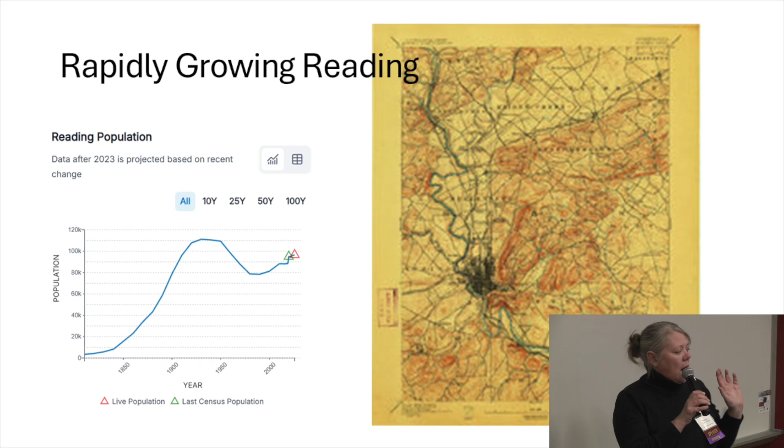Reading had a very interesting population curve from when we were founded in the 1740s. We are now 278 years old this March. From about 1800 to about 1900, we doubled our population every 10 years. That's a lot of growth, and obviously it's a lot of poop. So having to deal with that became a critical thing for the City of Reading.

On the 1894 map, which was right around when we were peaking in population, we are the black blob up here. That is the city, and you can see all of the watersheds marked out here.

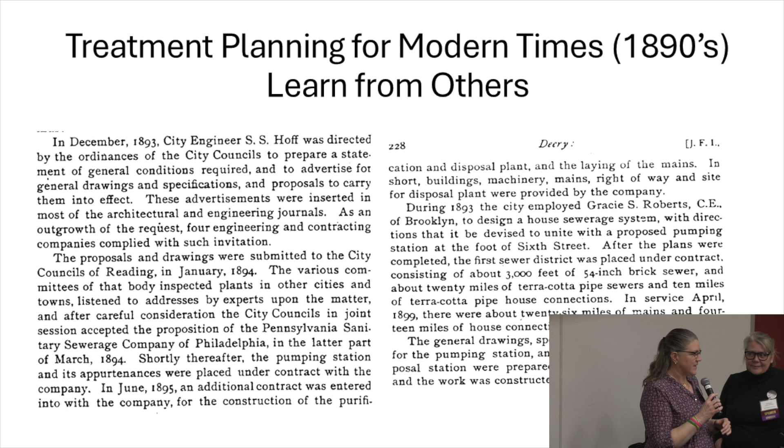What we did here was try to learn from everybody else and look at things more holistically as we went through. We had a few really key decisions made early on.

For the collection system, in the United States everybody was combining their systems. You get the stormwater in there, it washes your pipes, and you don't need to worry about maintaining 2 feet per second velocity because the stormwater washes it right through. But in Europe, land was at more of a premium, so they wanted less land for a treatment plant and kept the systems separate. You have less that has to be treated.

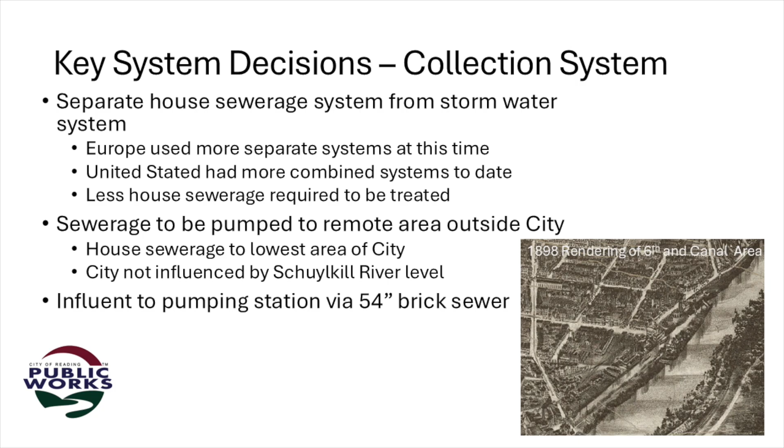The city, thankfully, made a very important choice - our forefathers were great, we're separate. They also learned from other places and wanted the sewage to flow by gravity to the lowest part of the city and then get it out of there. By doing that, the river level doesn't impact what you're doing. The influent to this pumping station is the same 54-inch brick sewer we have today.

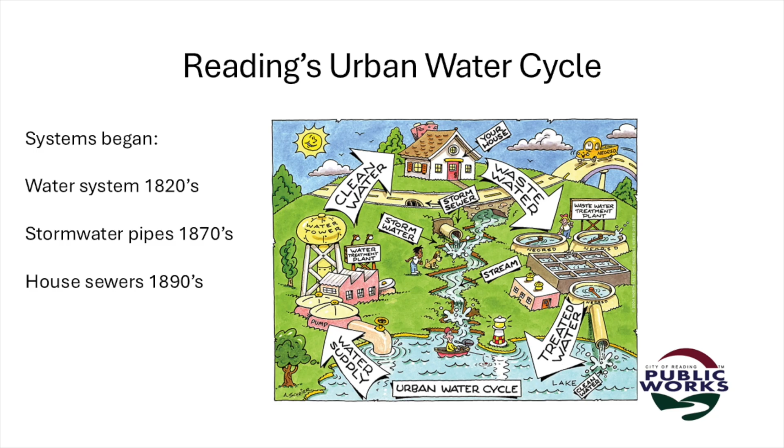So our urban water cycle - clean water, wastewater, and stormwater - are all separate. The water system started in 1821 up in Hampden Springs Park and had little chunks added over time as areas grew. The area we're in right now was part of the Angelica Water and Ice Company, I want to say in the 1870s or 80s.

Stormwater - we started putting in pipes in the 1870s in the city. We had a lot of open swales before that, but actually putting it in pipes to get it away started before we tried to get the wastewater away, using house sewers, as they were called. So if you're in an older city, our manholes say 'house' instead of 'sanitary sewer' because it's really old - that's one of the ways you can tell.

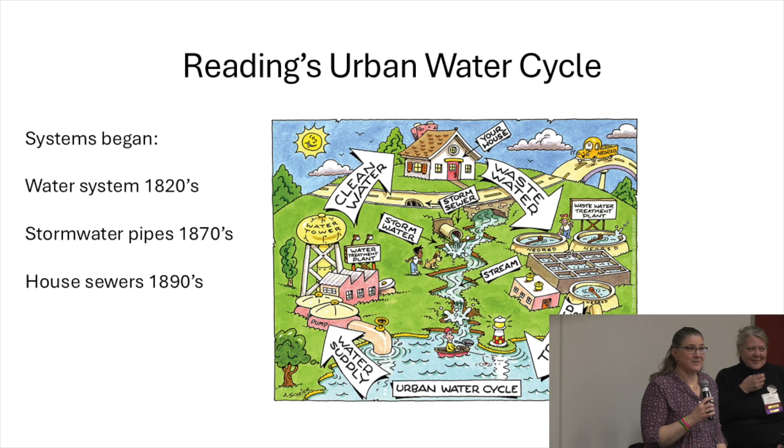For the pumping station itself, there were key decisions made. They knew the general area they wanted to be in. They picked an area only 250 feet from the Schuylkill River, and there was actually a Schuylkill Navigation Company canal lock 150 feet away. It has a blessing and a curse to it - all the choices in life we make have both. Everything could flow by gravity to that low point.

And we continued to have everything flowing by gravity to that low point until the 1950s.

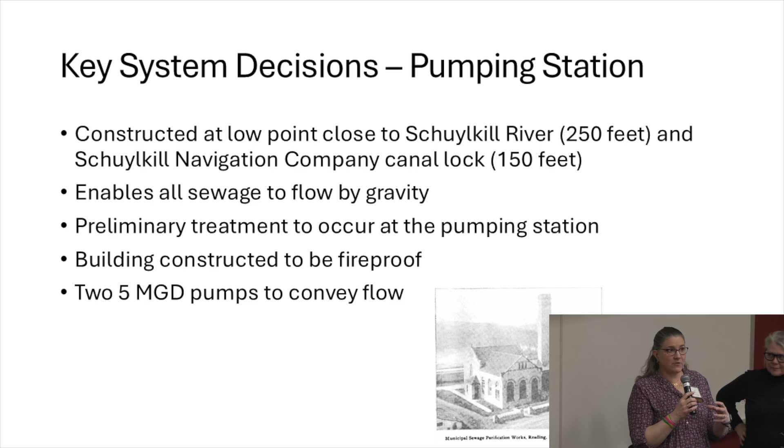Preliminary treatment was occurring at the pumping station. The pumping station was constructed before the treatment plant, and you need to get all your pipes coming together first. So by putting preliminary treatment there, you're also trying to take care of some of it.

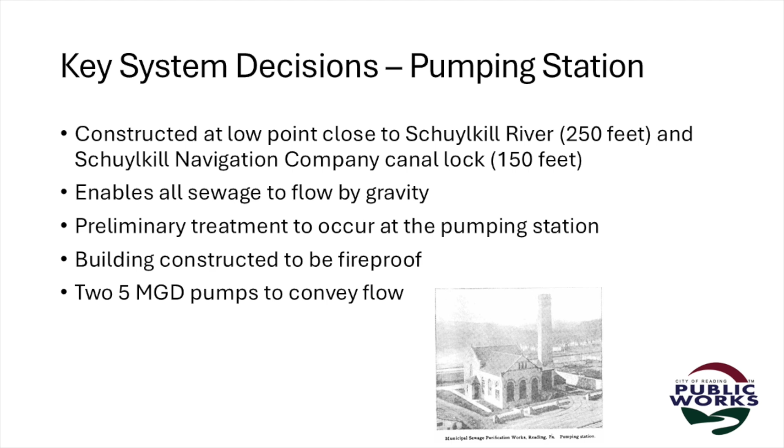If you see in the picture there from the original plant, a nice big smokestack. With that smokestack, we also need to have a fireproof building. Think about some of the big fires that have happened over time. Definitely a smart choice. Initially, we had 2 pumps capable of conveying 5 million gallons a day.

Preliminary treatment. You think, what can that be? You're in an anthracite coal area. You've got coke screening beds, and you're removing grease, then heating it and drying it for the screenings.

We're using air around the flue so that we're able to take advantage of the differences in temperatures to get airflow and improve the airflow. And we put in big skylights because light is really good, it helps to purify the water. Just so you understand, there was absolutely no unpleasant or offensive odors in or around that building where we are heating and drying grease.

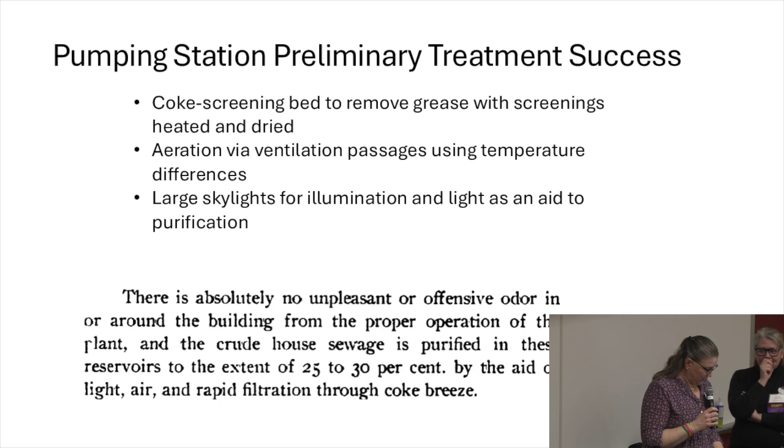I think perhaps deodorant wasn't around at that time, or people's noses were different.

In reading some of the journals, which are very interesting for an engineering geek, to do the pump station, that force main crossing the Schuylkill River, they constructed across the river and would raise up a section of pipe, float out the next one, raise it up, do the joint, lower it back down again, float out the next section of pipe. They did this so they could put in one 450-foot long pipe section into the Schuylkill River.

The treatment plant itself was slow sand filtration. Again, we've got light and air because those are really good things for us, and the microorganisms are going to take care of the treatment. According to what they tell us, 98 to 99% of the original material in the wastewater from the homes was removed at that point.

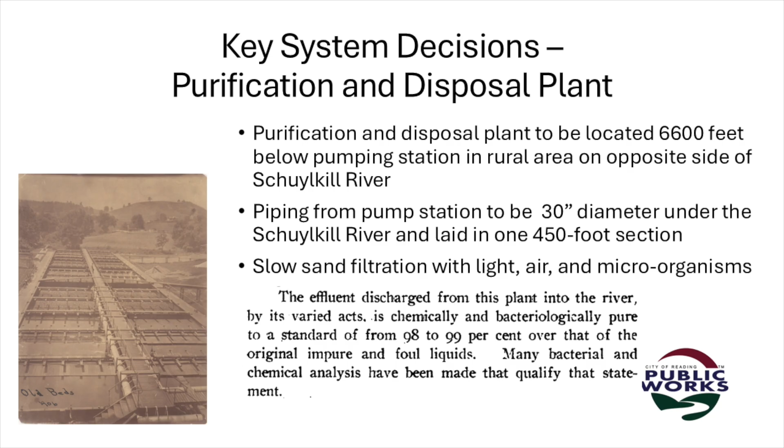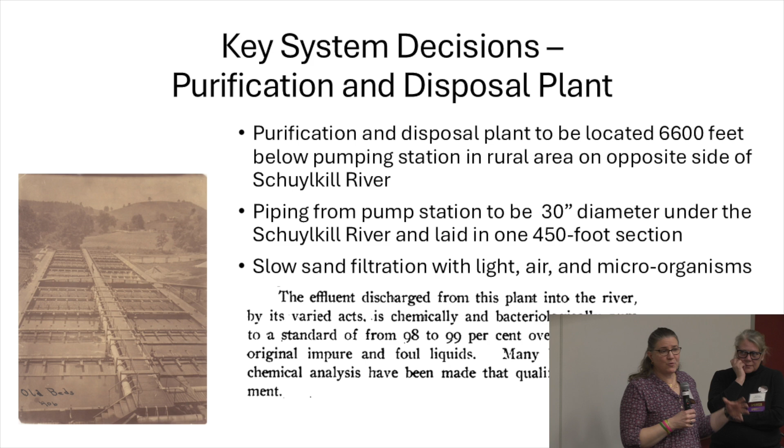Now, what you're seeing on the slide there is actually what they call the old beds, the old beds in the 1906 era. The original beds were 2 layers separated with 10 feet in between for air to pass through, but really a lot of splashing of water.

For the perspective on construction and operations, you'll notice there is the horse out there when we started to do things on Fritz Island for digging. The gentlemen are wearing their 3-piece suits with ties for construction. Do not forget your hat. And the poor sucker in the bottom picture is standing in the middle of wastewater spraying. So things were a little bit different - OSHA was not yet in existence. The part I find most interesting is actually the excerpt of an engineering textbook that my husband gave me,

which talks about egg-shaped sewers, because we knew we had them in the storm sewer system. And when constructing a force main within the last year, we learned we actually have egg-shaped sewers elsewhere where our mapping says they're elliptical, but they're actually egg-shaped. Ironically, my engineering colleague and I both took a class on egg-shaped sewers. It's a really interesting concept when you think about it - as your flow increases, you're able to continue to scour the pipe because you're now conveying more flow.

Kind of like they used to use inverted siphons, and now you don't hear anybody using inverted siphons. But from an engineering perspective, it's really cool. When you start to look at determining what the actual equivalent diameter of pipe would be, it is a funky set of calculations because you have 3 different circles to calculate for. If you look at the bottom, there are the old and the new egg-shaped sewers back in the 1800s. It gives you a very different perspective for how we do things now.

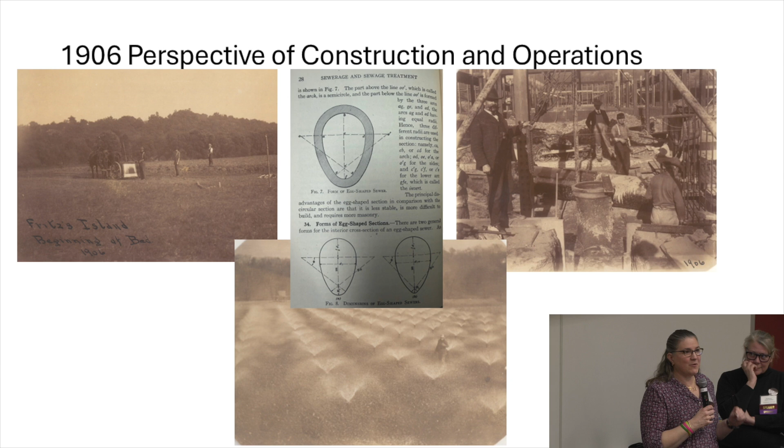The Fritz Island wastewater treatment plant is what we have today. Fritz Island was an iron mine, and it flooded in the 1880s. There are a lot of articles that were written about it. There are still some people that can find things - there's some particular type of funkiness about the ore people look for on Fritz Island.

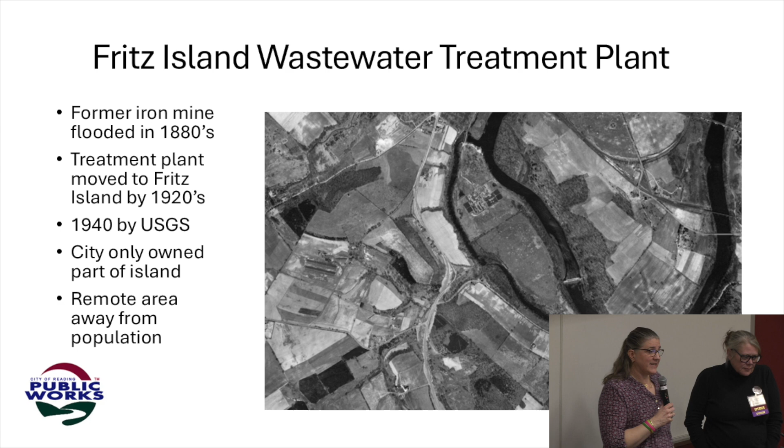But we started moving the treatment plant there in 1906. By the late 1920s, we had everything over there, both liquid and solid. And what you're seeing here is a 1940 map by the USGS.

As you look at the island, there's a distinct line. The city only bought part of the island originally, so someone else owned the other part, and poor Ms. Archer was stuck with the treatment plant. But it was away from the population.

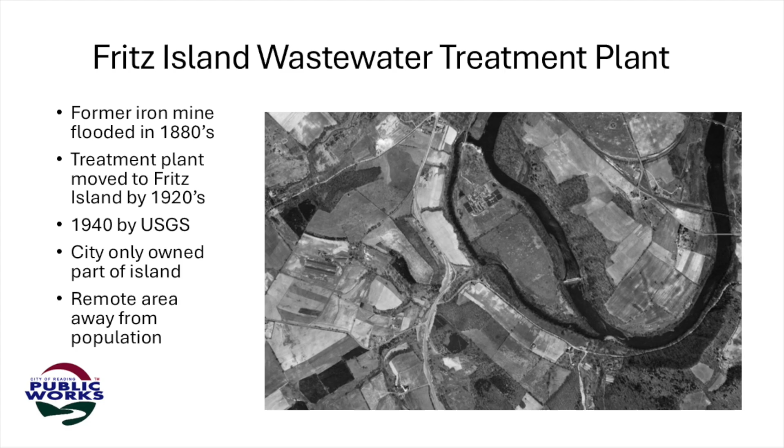So this 1940s map really shows you how much it was farmlands around there compared to where we are today. As the city grew, as Beth alluded to, the city grew by leaps and bounds at times. So here you're kind of looking at the city.

These are what we call our sewer districts, with number 1, bottom center, being right around 6th and Canal, where the pump station was originally constructed. You can see we were adding on to things around there, and as the population grew more toward the center of the city, then you come back down again at times as there's a bit more growth and industrial growth into the hillside.

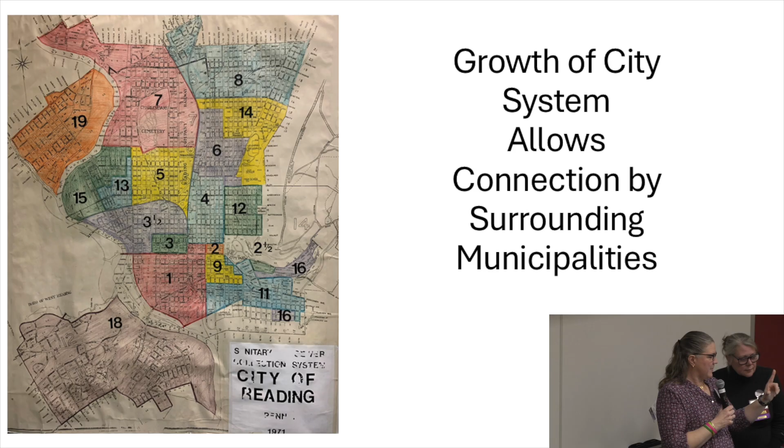So we gradually have more and more. As you look at the bottom left of the screen is the 18th Ward, where we have a number of municipalities that have flow coming through there, and the top left of the screen is the 19th Ward, which has a few more municipalities coming in there.

You start to see that the city, when you're looking at this map, the center with the multicolors in the very center is the city. The colored and shaded areas outside of that are the areas that are served by the treatment plant.

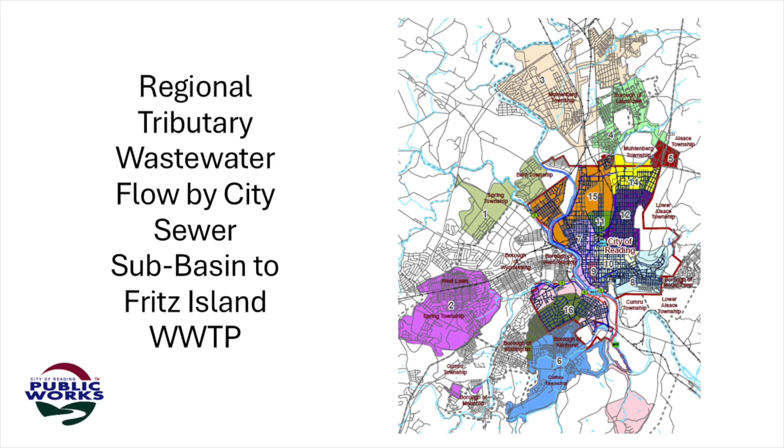You will notice that next to the city, in this area right on the edge, there's actually another treatment plant. So that area is sewered. Don't worry about that, that area is sewered. But it allowed for more growth of the suburban area to happen more quickly.

When you start to look at where things came from, the 6th and Canal pump station has a good chunk of flow that comes in through it. We have some things that come in through other areas, and we've got 2 main areas. About 85% of our flow comes in through 6th and Canal, so we're pumping millions of gallons a day, every day, under the Schuylkill River.

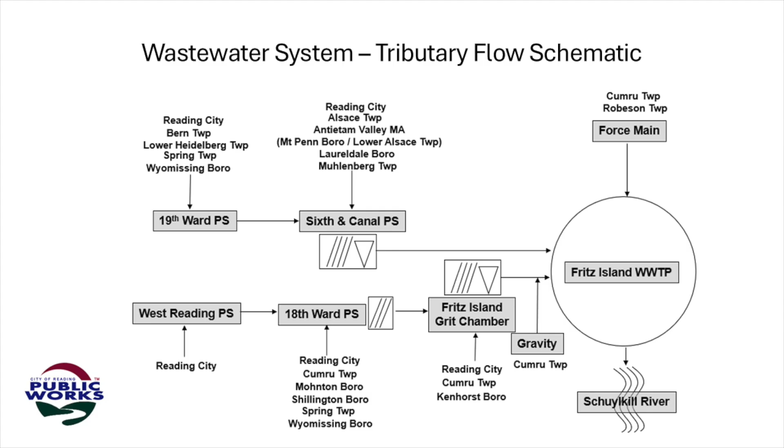But we are still having, today, grit and screening removal happen at 6th and Canal. We stayed with a lot of the original decisions that were made in the 1890s, and they still apply today. The Fritz Island Grit Chamber takes care of flows coming in from another direction, and again has screening and grit removal. So you'll see there's only a couple little lines that come in without having any type of screening and grit removal, and the one in Cumru is what the municipality where we are now used to be.

As we grew and were able to take in more flow, we had some very prestigious people designing things for us. The textbook I had in college talked about the Reading Wastewater Treatment Plant as having the world's largest trickling filter plant, 212 feet in diameter. We had 4 of them that size. It's quite something to see, and we'll give you some perspectives on it as we go.

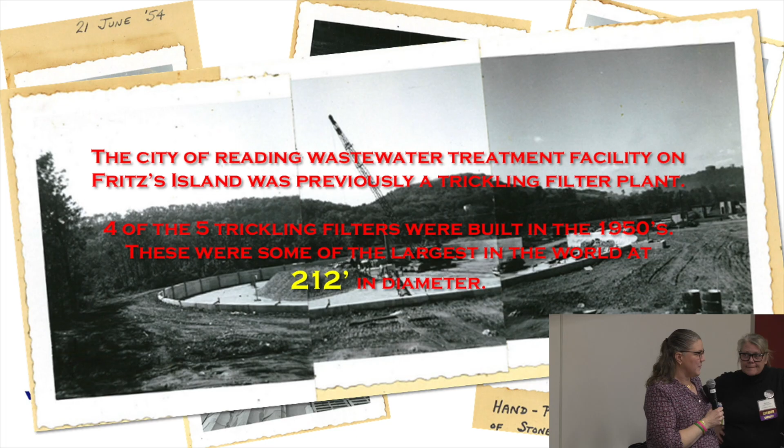The city started in 1893 making the decision to treat the wastewater. The liquid side expanded onto Fritz Island starting in 1906, but kept the solids on the opposite side where the original plant was. By 1929, we had fixed nozzle filter beds with rock media, because that was what was available.

In the 1950s, we had a lot of growth. We started to serve the suburban areas surrounding us, and we also constructed 2 pumping stations for larger areas that the city had recently acquired from neighboring municipalities that are now townships of the first class, so the city will no longer acquire their land.

1958 is when we actually did huge updates. The trickling filters had clarification between the 2 stages. We had primary clarifiers, final clarifiers, elutriation tanks. You don't see them or hear about them too often anymore, but when you have a trickling filter plant, it's a great way to try to concentrate your solids before you digest them. And we had 3 anaerobic digesters.

In 1983, we constructed another final clarifier because the one that was a final clarifier had to become an intermediate. You couldn't have that much flow coming through, and we kept having issues with clogging the rock media. When you have a rock media trickling filter that's not super deep, only 6 foot deep, it's really easy to get it clogged. So by allowing the Schmutzdecke layer, that biological layer sloughing off, to settle out, it makes the next stage of treatment better.

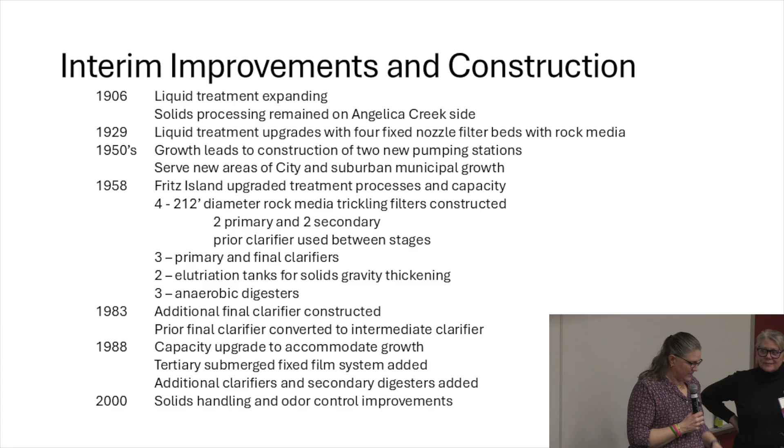That tank was in service until the most recent upgrades occurred. A lot of tanks from 1958, some that we added. Then for 1983, another chunk being added. And then you start to see we have odors and doing improvements to solids. As the plant gets bigger, so do the needs for other things to support it, and just the room in buildings.

So from the regulatory and compliance side, we had DER come around in 1971. Which then became DEP as we have today, and they had the Clean Streams Law. Initially, the Department of Health handled a lot of things for how it was with the wastewater side.

But we had consent orders. We were cutting edge in the 1890s. We were still cutting edge as we introduced secondary treatment, and I want to say it was 1908, we were the first with secondary treatment. Yeah, okay. It went downhill pretty fast.

We had consent orders and agreements that would compel us to construct things, so that by the time we were in the 50s heading into the 80s, some of the headlines would read things like, city engineer says that the regulators wanted a $50,000 fine, but we talked them down to 12. It didn't say we solved the problem. It said we talked down the fine.

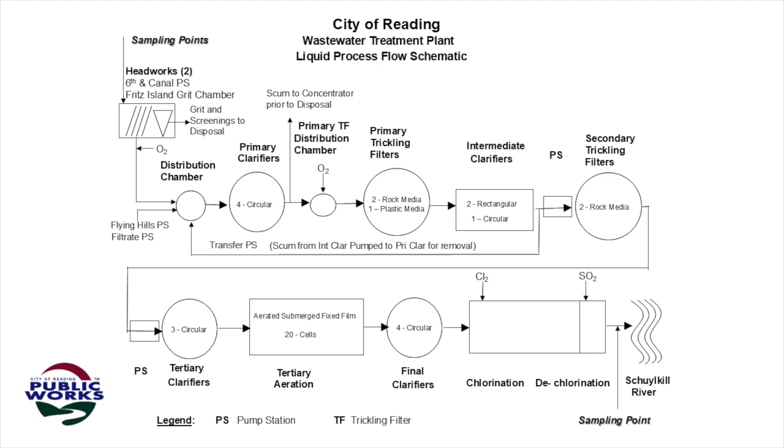And 85% of my flow came from 6th and Canal. So I've basically pumped all my flow three times. It's a lot of money for electricity.

The solid side was pretty straightforward. Some chemical additions using gravity belt thickeners, which is kind of like a belt filter press, but you don't get as high a percent solids, but it makes it more efficient when you're in your digesters. Anaerobic digesters—one of them could hold gas. All of them at that time had floating covers.

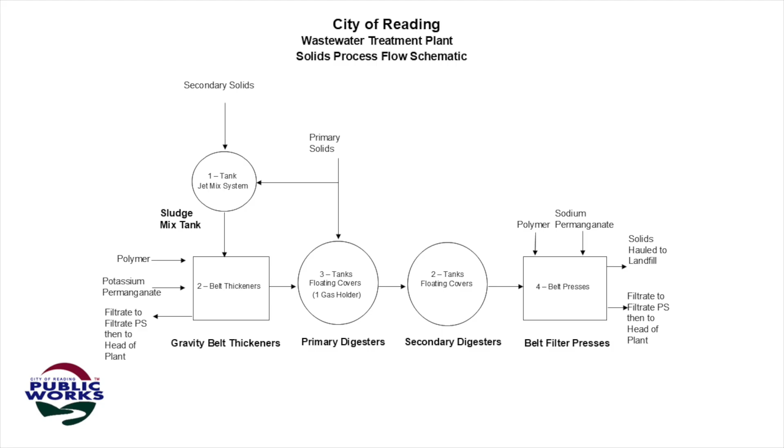Into a solids building where it went through the belt filter presses. Out we go, and we return the liquid back to the head of the plant. Fairly simple.

The consent decree studies and construction, the remedial measures, were really focusing a lot on how we ran the facility. Maintenance management, and a lot of these things we already had—it was a matter of making them more formalized, better documented, really.

So we had a computerized maintenance management system. We already had a SCADA system to be able to track what was happening at places throughout the plant. The influent and process control monitoring—we didn't have one central place that was done, so we had to do a lot of calculations for that.

We had certified operators, not as many of them as we should, and not one on every shift. We had operations and maintenance plans, but again, not as formal as they wanted. When you look at the wastewater treatment side, the plant was rated for 28.5 million gallons a day.

One thing we had to do is evaluate the existing plant. So we had a firm that had one of the premier trickling filter experts in the country, who actually did his doctoral dissertation on the trickling filter calculations used to evaluate their efficiencies and capacities. We learned a lot. When you take into account the highest strength, the highest flows, and the lowest temperatures, we were lucky to be able to get 10 MGD through the plant and still be in compliance.

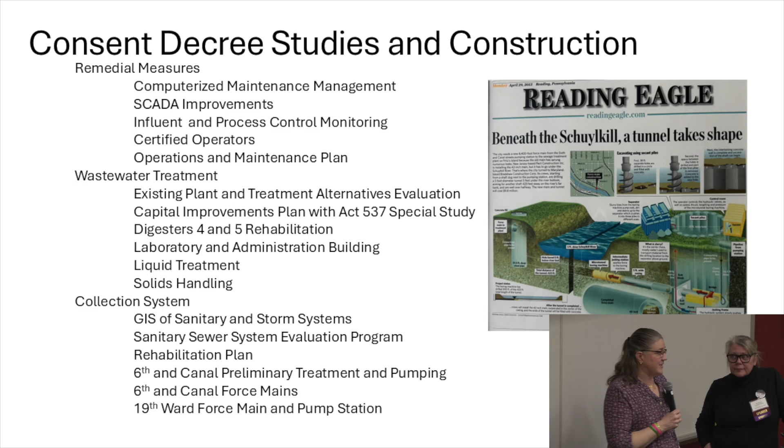So the 6th and Canal pump station today is very similar. Arched windows—the smokestack is gone, but arched windows, preliminary treatment still occurring there.

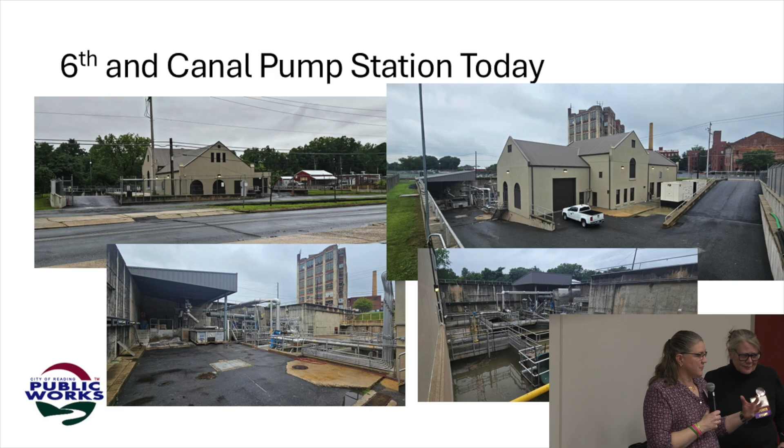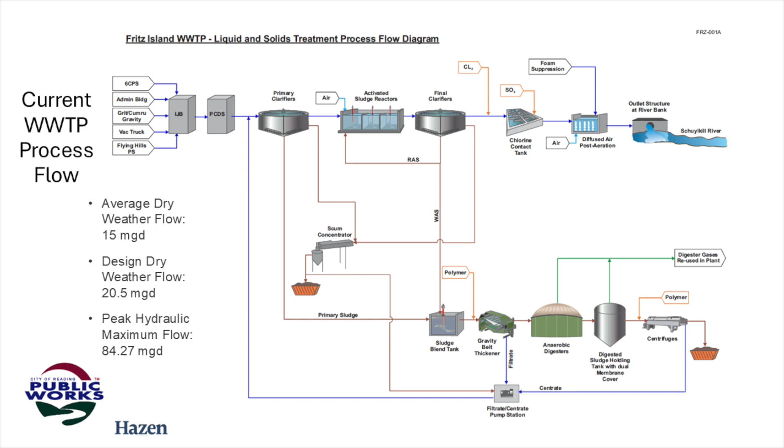The current process flow is much simpler. I can fit it on one slide. You basically have one tank in the middle here that is where all the biological action is occurring. Much, much simpler.

So Fritz Island 2020, looks like this. There have been a lot of different changes, and it's not an easy thing to construct when you have something in service.

But we went through, going through the slides, we have one place where all the influent comes together. We have blowers that ramp up and down, turn on and off based on the needs, based on the dissolved oxygen. We have fine bubble diffusers in the reactors.

The reactors are each approximately the size of a football field. We were able to reuse a number of tanks, including the primary clarifiers.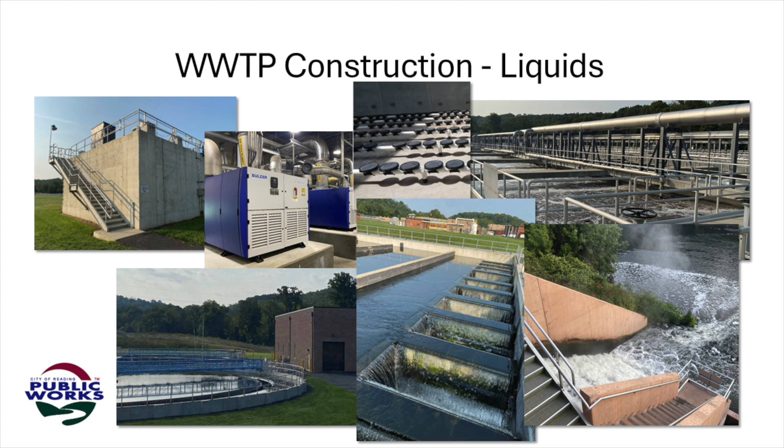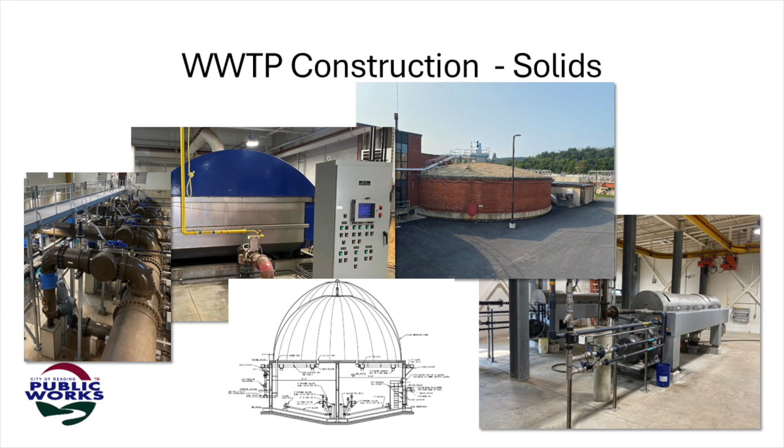On the solids side, we kept the same solids building, put an addition onto it, and switched from belt filter presses to centrifuges. Initially, the digesters were supposed to have additional secondary digesters, but due to some cost-cutting measures, we are still just using primary digestion now, with the existing digesters having been rehabilitated.

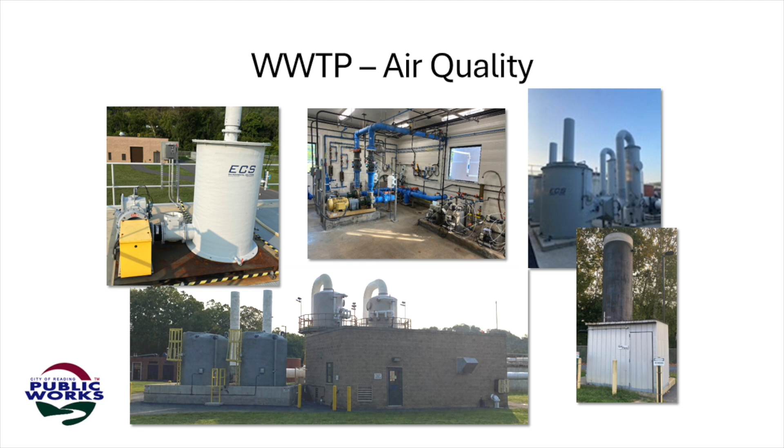Air quality, not major changes, just some rehabilitation there, but the influent junction box does require the air to be treated. The city achieved a number of goals with the improvements.

Now our two big pump stations have redundant force mains, so we're able to take a force main in or out of service. For 6th and Canal, for the flows that we can get from there, if we have all 6 pumps running, we need to have the second force main open.

We've gotten rid of the redundancy with the forward flow. All the influent flow goes to a single point.

We had a number of treatment tanks before that were in the floodplain. So as the Schuylkill River rose when it did in 2006, so did our plant, to the point where we had an area approximately the width of a Ford Explorer that you could drive in one area, and it was the Schuylkill River on one side and the treatment plant on the other, and the waters were all intertwined.

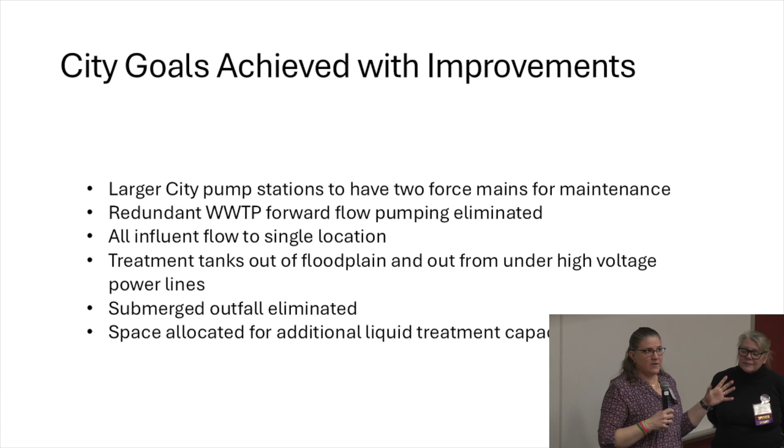So we got rid of that. We also have additional space, as you saw in the picture, a large football field area for additional liquid treatment.

There have been some challenges. The design was done and redone and sat for a time while there were some value engineering changes to take care of some cost issues.

Some of the big ones were really that there was a different treatment technology, meaning a different type of operator certification required. You're no longer a fixed film plant, you're now an activated sludge plant. Your process control is totally different.

When we made the switch, I believe we had 3 people who had ever operated an activated sludge plant, and that includes one of them that was only at an industrial plant. So that was definitely an issue.

We also didn't have much experience with centrifuges for dewatering. The focus on everything had been liquid treatment, so the digestion and solids side didn't get as much attention, and we've had to make some changes, and we still have to do a little bit more.

The new facility really doesn't have as much operational flexibility. The old facility, there were things that were thought out so deliberately, and the way it grew, there was a lot of flexibility. As we tried to overcome some things, we realized that we had hydraulic imbalances in many places in the plant.

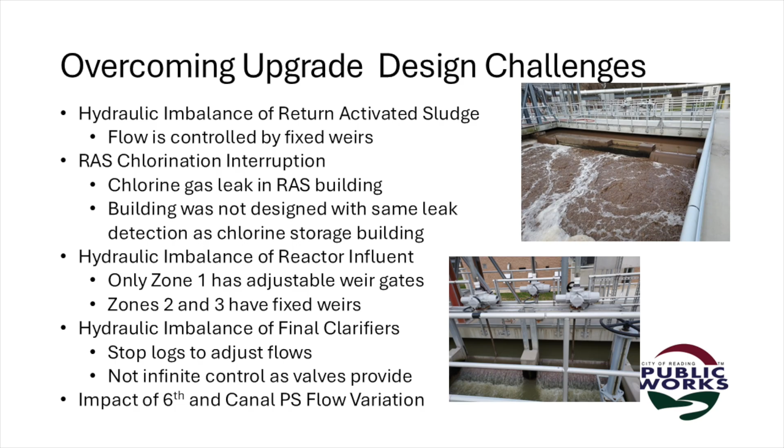In activated sludge, one of the key things is that you're returning that microlife as it settles in the clarifier back to the head of the aeration basin. We had a big hydraulic imbalance there.

Fixed weirs, just trying to take a tank out of service, can be very challenging.

Chlorinating the RAS is something that you do for process control. If you have the wrong type of microlife, you want to add chlorine and kill the bad guys.

But the building that had the injection point wasn't designed to have chlorine gas in it. So we had a chlorine gas leak, and nobody knew it before they went to enter the building. I had 2 employees retire very shortly thereafter, and we no longer use chlorine gas for that purpose.

We actually maintained something that was temporary during construction, because you can use sodium hypochlorite as well. It's more expensive, but it is safer.

Without staff, we are nothing. So that's what we do.

The reactor itself has 3 zones. It's actually set up to convert to a 5-stage Bardenpho flow to be able to accommodate BNR. We've looked into parts of it, but one issue is we can't adjust how the flow is coming into the plant as much as we'd like. So we're notching on things gradually. For the final clarifiers, 1 out of 4 gets almost half the flow, and we only have stop logs to adjust that.

The other thing we learned is, as we were doing the improvements to 6th and Canal, the pumping improvements, which were the last of the improvements there, it has a huge impact on the reactors and the flow coming in. So we're doing things now to tie that together, to have communication from the pump station to the plant directly to the reactors, so we can get ready for the flow before it gets there.

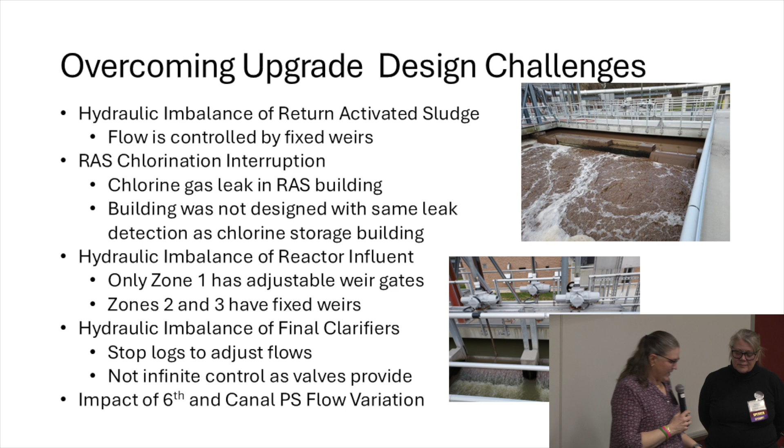How do we really figure some of these things out? We have a project management, construction management team we've worked with for the last 20 years. We started working with one of their operational process engineers. When we had a major process upset, we started with phone calls to review data. We make 1 change at a time. No knee-jerk reactions. It's micro-life, they're microorganisms, you treat it like your own self. You can't change too much at once. It's not going to go well.

We also had a lot of on-site visits that we'd schedule, and at one point it was like every other week somebody was coming down from New York to give us a hand with things.

We also recognized that with staff with limited experience, one of the key things was training. We need to be able to learn from our mistakes, laugh at some of them, but we actually had 4 2-hour training sessions developed and presented for us. When someone presents a training session for our plant, you're presenting it 4 times because we're staffed 24/7 — shift 1, 2, 3, 4 on one union and A, B, C, D on the other. So 4 times for everything.

We also learned the hard way that the spare parts inventory wasn't exactly what we would have desired. This year we received a rotating bowl assembly for a dewatering centrifuge, $470,000 for one. But before sending one back to the manufacturer, we had to have the manufacturer come in and help us take it out. With the high rotational speeds, you're looking at almost 2 months. You can't go from 2 centrifuges to 1 — now you've got no time for maintenance, you've got nothing. So that was one of the things we determined.